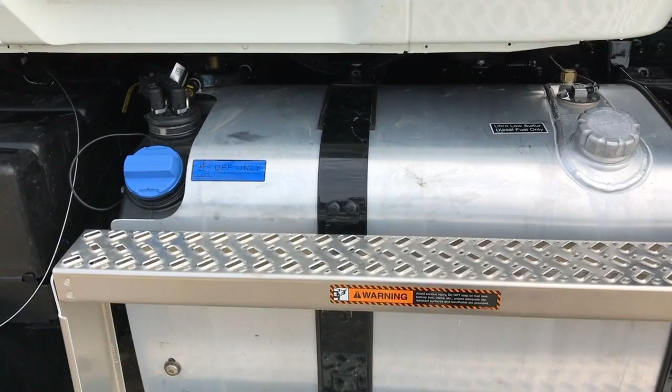This morning I've got a little project to make some parts for these dump trucks. For those of you that don't know, I've got a customer down the road that takes these large Mack chassis and huge dump beds and does the final assembly on it. A lot of times they're missing the parts they need, so I thought I'd walk you through the process I go through to make up some parts from an example they give me. Let's go in the shop and take a look.

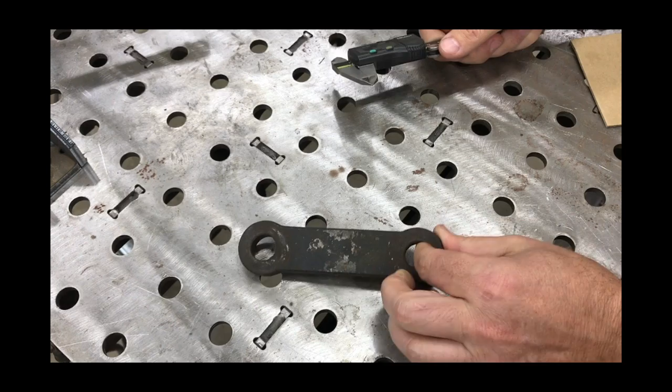All right, so here's a typical kind of job that I get in, and I thought I'd walk you through the details of coming up with this. This is a strap that goes on the gas tanks for those large dump trucks, for the company down the road here that puts those together. They need more of these made, they want 6 of them made, and they don't have any blueprints or drawings. They just gave me one of these, so we're just going to copy it, and I'll walk you through how I do it, and you guys can let me know if you would do something different.

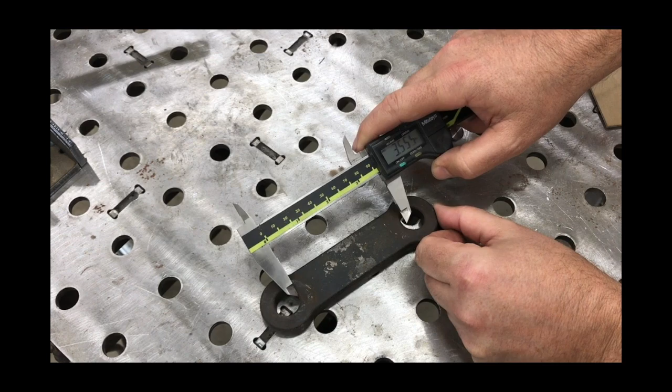First thing I want to do is get the bolt spacing from center to center. But in order to do that, I'm just going to go bottom to bottom, which should be the exact same thing. So I come up with 4 inches, 249 thousandths. We'll go top to top just to verify that. And it does look about the same from top to top, bottom to bottom, so that should put us right on where we need to be, center to center.

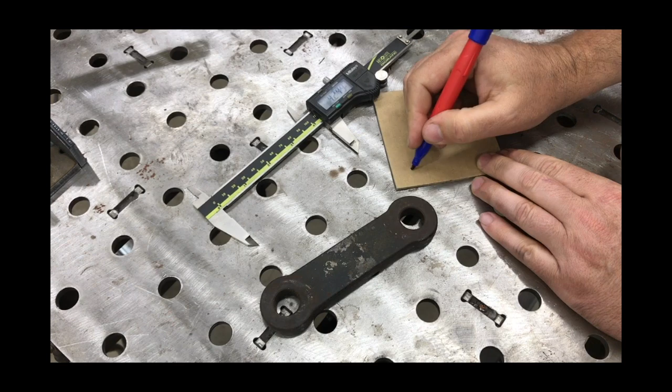So I'm just going to write that down. Let's see... 249, man my writing's terrible. 4.249. Okay, so the next thing we want to get is the hole diameters.

Because when you get ready to do the CAD on this, anytime you're going to try to copy something, you just look for geometric shapes. So what you see here is two round circles basically - an inner circle and an outer circle - and then a rectangle, and that's it. So two sets of circles copied, and then a rectangle.

So let's get the ID of these. I don't know if they kind of look plasma cut - you can see how that hole is blown out. But it also has an embossed set of letters on there, and it appears to have a casting line down the center. So maybe it is cast, and that was something from the casting there. I'm not sure, but anyway, let's get the ID of the holes.

The top side of the holes look more round, you can see the back side's kind of blown out there. So we'll take a look at the ID first, and we'll take a couple of different measurements. I'm coming up with 672 thousandths, and these are just clearance holes, so when I cut these I'm going to probably cut them a little bit bigger than that, just to make sure I get it right.

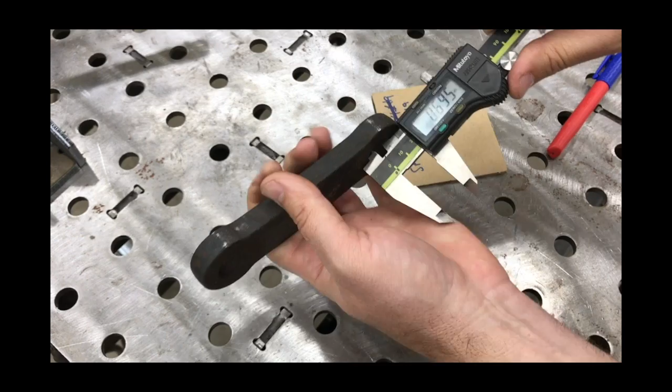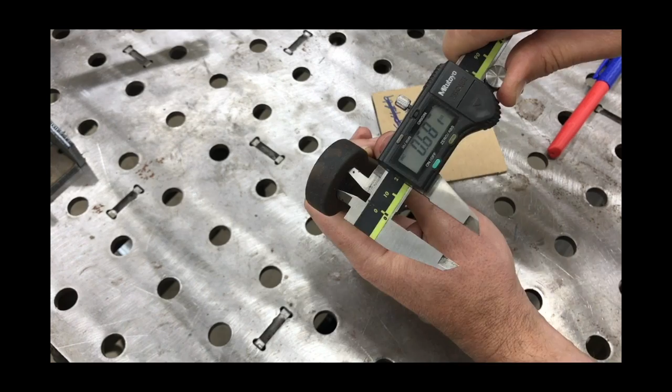Now let's look at the ID. Let me double check this one down here, and we'll write that down. Yeah, see, that one's actually bigger - 706... 687... 711. So I'm going to make it 720 thousandths just to get it a little bit bigger.

So I'm going to go ID... should be 0.720. Man, I can't write today. 0.720. All right, so now we'll look at the OD of these circles.

It's basically 1.5 inches, we'll double check it. Yeah, so OD is 1.49. They told me the outside dimensions of this was not critical - in fact they said I can just make it square with 2 holes, the hole spacing was the critical part. But I'm going to make it just like this, no reason why I shouldn't - it's not that much extra work to do.

So now I need to get the width of this rectangle, and it appears to be 122. I'll just grab it in a couple of spots here. Yeah, if I get it right at the casting line, 1, 2, 3.

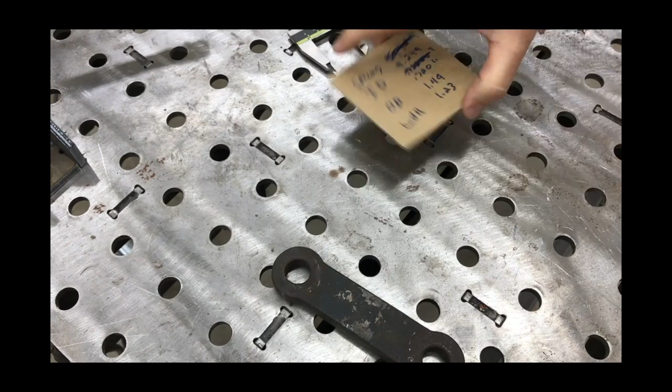So I'm gonna make it 1, 2, 3. So width, 1.23. So now I have everything I need to be able to do the CAD work on that.

For those of you that do not watch my other channel, I actually live here in the shop, and some of you may or may not know that. So we're just going to go into the living room, where you'll notice some of the things that I've made on the channel. And here's where I do my CAD work, Fusion 360, that kind of thing.

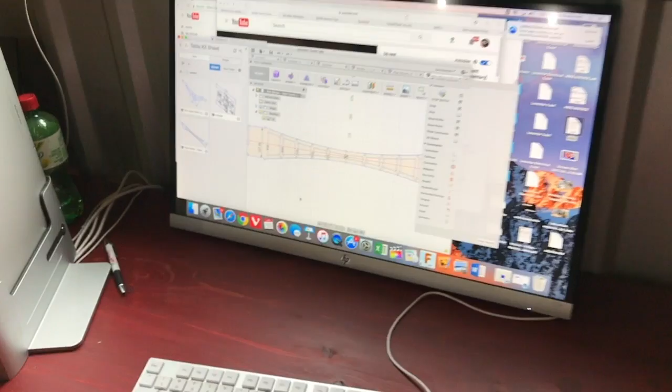So we'll get you set up and take these dimensions and put them over into Fusion 360. Okay, now you see we're in Fusion 360. We'll go ahead and make this full screen. This is for the Lone Star company. You see I've got some other parts I've made for them, but we're gonna just close this window out to maximize our space, and we will go and create a new design.

The first thing we're going to do is the circle. I'm going to hit a circle here, and it's going to be a center point circle. We're going to choose this plane here, and I'm going to draw this circle off of the center axis to lock it down to that. So if you look at our measurements that we took, we're going to do the ID first, and the ID is 0.72.

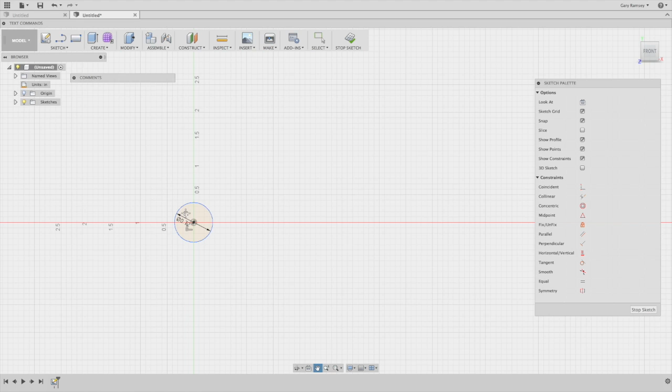Now there's a lot of different ways you could do this. Lots of people do it lots of different ways. I'm just going to show you the way I do it. Some of it may be correct, some of it may be sort of hacked, but this is just how I'm going to do it. One way you could do it is just draw half of it and then mirror it, and that would save you manually drawing lots of stuff. You don't have to draw half of it. But for now, I'm just going to do it the way I would do it.

So we got one circle there, that's the ID. I'm going to draw another one that's also 720, and that'll be the other circle. We know that the distance between centers is 4.249, that's how we measured it. So I am going to do a D for distance and click that and bring this down, and I'm just going to type in 4.249, which is the actual distance. So now we have our distance between the two circles.

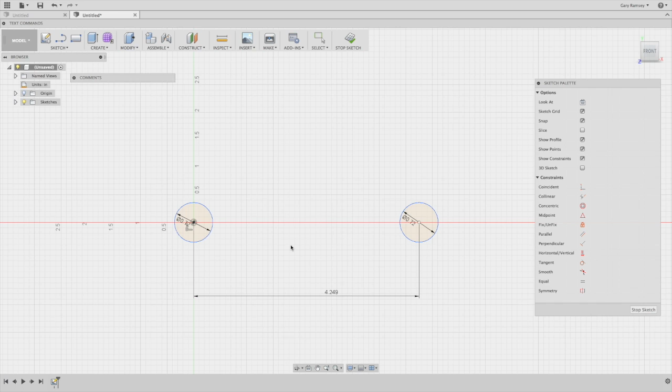The next thing I'm going to do is draw the outer circles, and the ODs are 1.49. So I'm going to just drag that up a little bit and type in 1.49. Same thing over here.

So now we have that, and here's the part that you could probably do a lot of different ways. You just need to draw two lines between those, but that line, they need to be 1 1/4 inches apart. So here's how I'm going to do it.

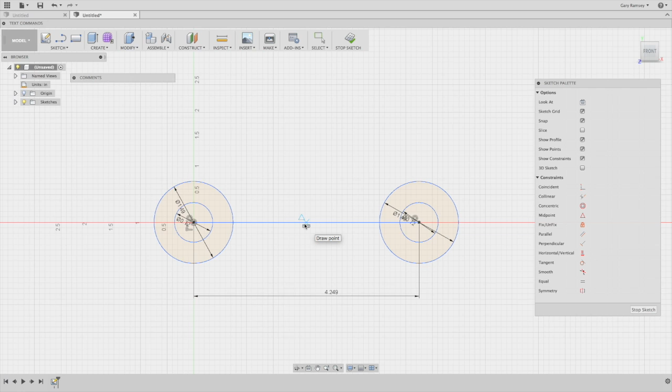First thing I'm going to do is hit L for the line command, and I'm just going to draw a line between these two, connect them together, and I'm going to go up here and put a sketch point. You'll see that as I hover on this line, it's going to give me a little triangle that indicates the midpoint of the line, so that is where I'm going to put that sketch point. You'll see why I did that in a second.

So now I'm going to draw a rectangle. I'm going to go up here and choose rectangle, and I'm going to do a center rectangle. I'm going to make the dimensions of this rectangle - I'm going to make it 6 inches, 5 inches long. And we know by the dimensions that we took that it's 1.23 inches wide.

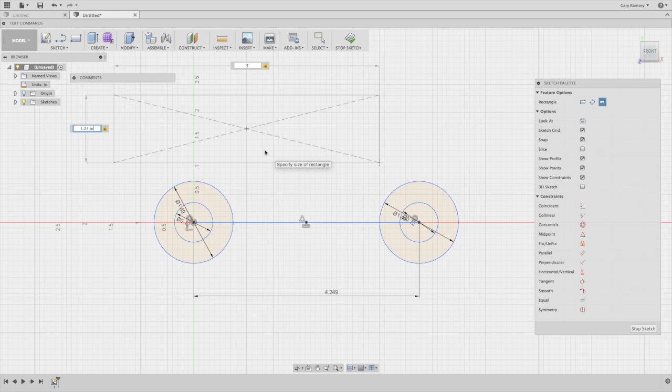Whoops, I messed that up. So let's do it again. 1.23 tall by, I'm gonna just make it 6 inches long, okay? So now we have that, let's change that to 5.

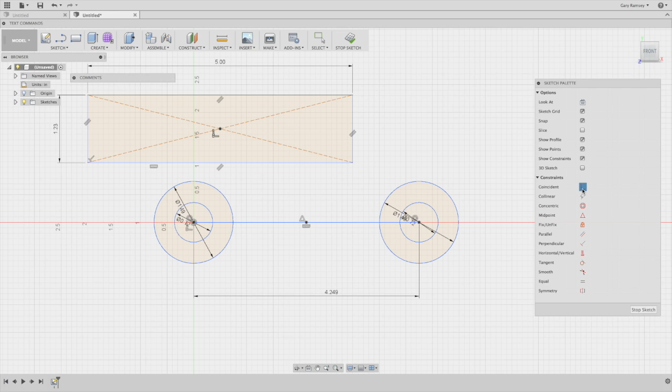Just bear with me here, I'm just kind of working as I go. So now what we want to do is, you see this center point and that center point, we want to get those lined up so that this is directly in the center. So we're going to use the coincident constraint and click on that one and click on that one, and you'll see that it brings it down in there and overlays it.

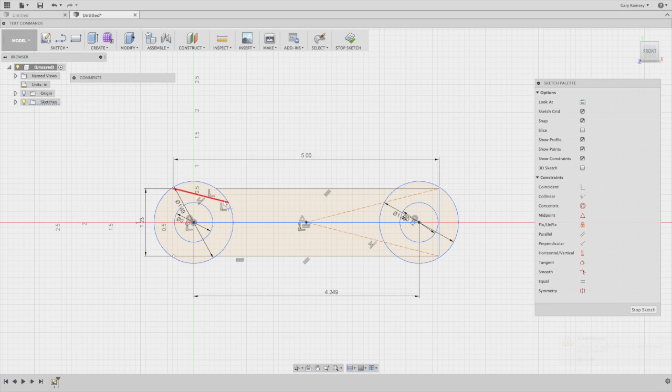But now you see we've got all these extra lines, and if we just tried to cut this like it is, it would try to cut every one of these lines. So we just got to go trim those out. I'm going to hit the T command for trim, and we need to get rid of that, and that, and we need to get rid of that and that.

Okay, so that now is looking more like what we want, so we got to get rid of that one. Got to find all these little extra lines. This center line, we definitely have to get rid of that. It would try to cut that out as well.

Yeah, so we're just deleting stuff. I remember seeing John Saunders do this a long time ago, where he just did his sketching by sketching out the major. I can see I deleted something I didn't need to delete there.

So let me go back. Let me get the T command back and get some of this out. I deleted that inner circle and didn't mean to. All right, so I think I've got all that now.

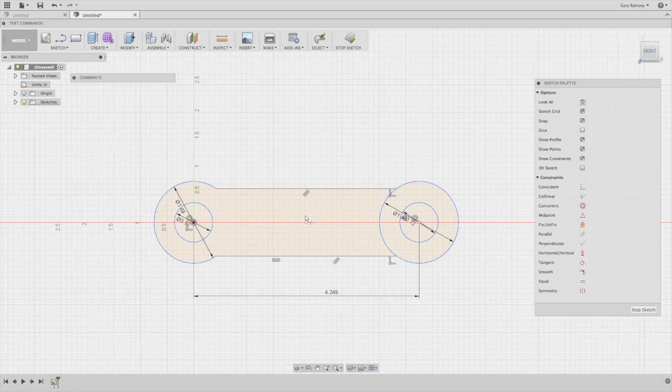So really the last thing that we need to do is extrude this. Oh no, I need to get rid of that. Yeah, so we need to extrude this and convert it from a 2D to 3D, and then we'll come in and add some fillets in here to just soften up these corners a little bit.

So I'm gonna go up here and say stop sketch, and I'm gonna hit E for extrude, and we're gonna extrude this. This is going to be a half inch thick, so we're going to go 0.5 there. And you see we have our part.

So now I'm going to come up here and go modify and add a fillet. I don't know how deep these fillets are. The fillet's going to go... I'm just going to say 0.1, just to add a little fillet in there.

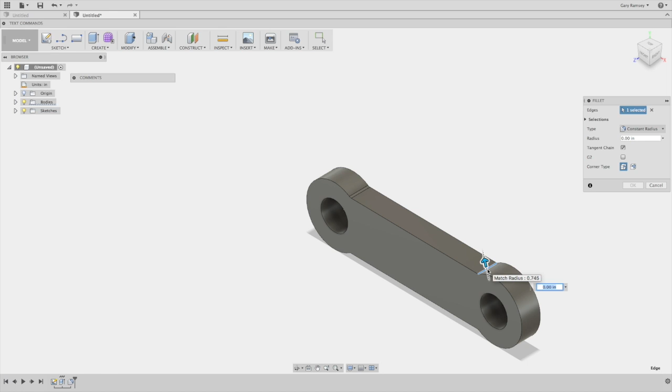All right, and we'll just repeat that. So 0.1. And we'll rotate this around so we can get a look at the other side and grab their fillets.

Okay, so I'll go fillet. Yeah, you can just hit F. I could have done all these at, selected multiple, done them all at the same time. So now we have a little softening right there.

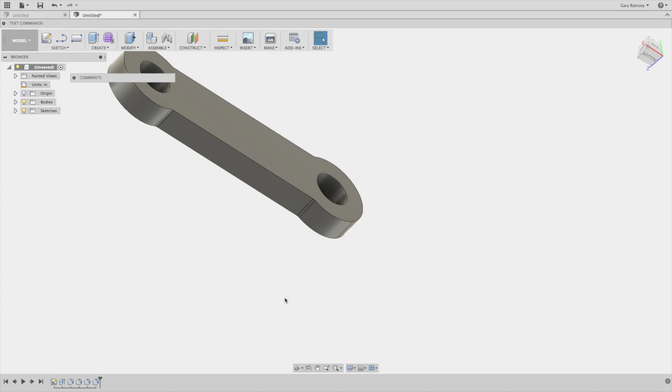Okay, so I think we're done. Now the thing about it is, when you're doing 2D, I don't know that I just, I might have should have added those fillets in the 2D, because what I need to do is now go back down here and edit this sketch. And yeah, see, it didn't carry those into the because it's in the basic sketch.

So what I need to do is add the fillets here. I'm gonna go and do that now. So we'll add that right there, 0.1. And this is just a repeat. Whoops, 0.1. Sorry for the audio there.

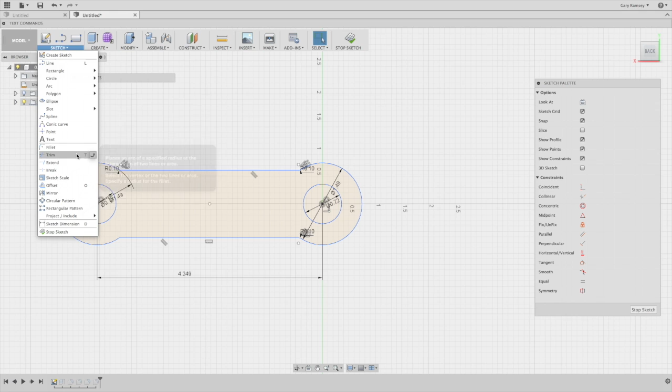Fillet, oh, I'm on the wrong thing. Sketch, fillet. 0.1. And the last one is 0.1. All right, and so I think you can do the cam in Fusion 360, but the post-processor for plasma cutting, I've not found it to work very well.

So I always use Sheetcam that came with my plasma table to do the cam. So I just do the CAD in here. So from here, I'm just gonna go right click on this and save as DXF.

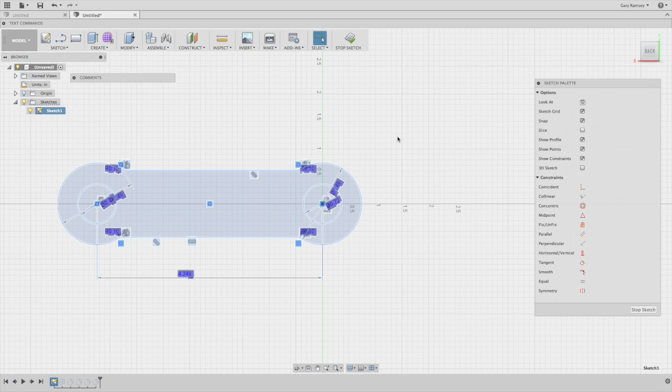And I'm gonna call this gas tank bracket. I'm just going to stick this on the desktop of this machine because we're gonna sneaker net it over to the... let's see, let me get you out of this. Yeah.

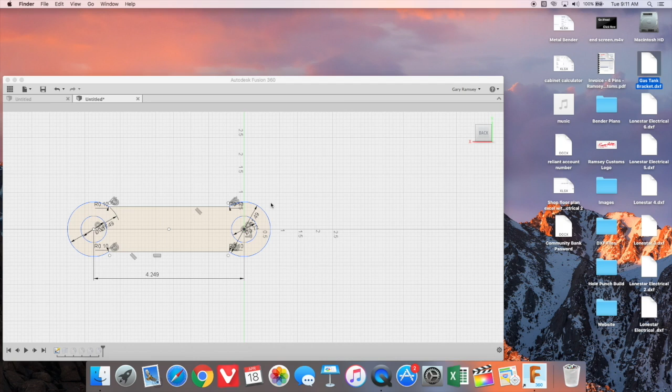So you can see, let me move that over. You can see my gas tank file there, and where I've done multiples. I'll just copy this over to my other computer and get it cut out. I may show you the CAM work as well, just to bring you along. But this is it for the CAD part - we're all drawn up and ready to go.

All right, so we're going to take our file that we just came up with, the gas tank bracket DXF, and we're going to drop this onto this thumb drive here, and sneaker net it on out into the shop.

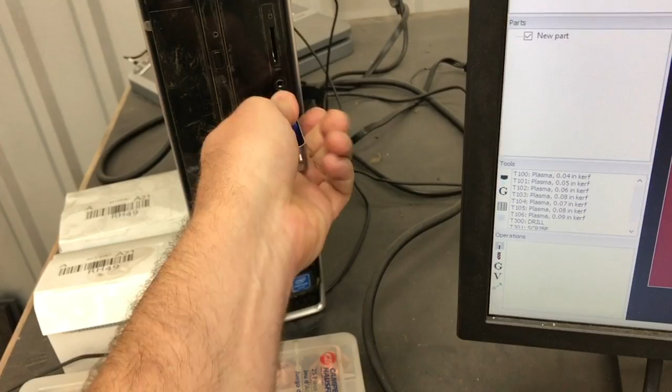And you see our plasma computer here. I mean, I could use my Google Drive, I could use any number of different things, but I'm going to skip taking you through my IT setup here and my lack of sophistication on that. But anyway, we're inserted here, and I'll get you set up and we'll walk through Sheetcam.

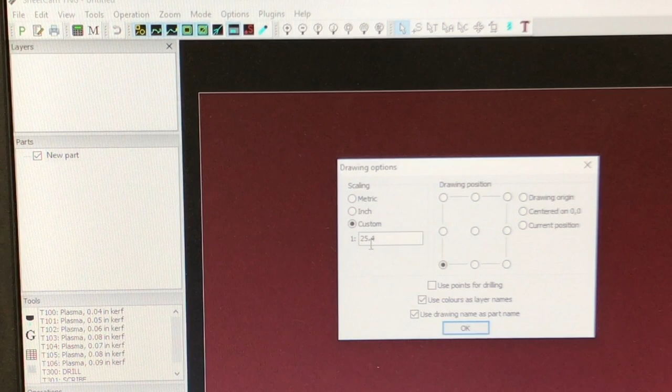All right, so what we want to do is go up here and click on import drawing. This will import our DXF file, and you see the gas tank bracket there from our thumb drive. Then this will ask you what's the scaling of it - is it metric? You can adjust the scaling if you want to go custom, and this defaults to metric, so 25 millimeters equals 1 inch, but we're going to just do it in inch.

But if you wanted to make this bigger, you would just say, if you said 1 to 50, that would mean a 1 to 2 ratio - it would make it twice as big. But we're just going to go with that, and now you see our part in there. You'll notice that very small chamfer that it added, or fillet. If you looked at the original part, it didn't have a very large fillet there, so I think we're good, and we could have left that off - it wouldn't have been a big deal.

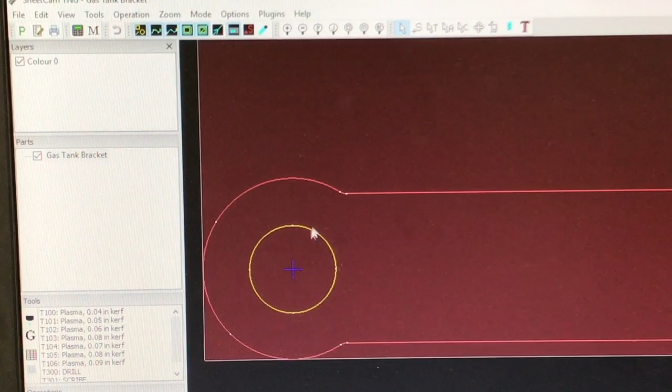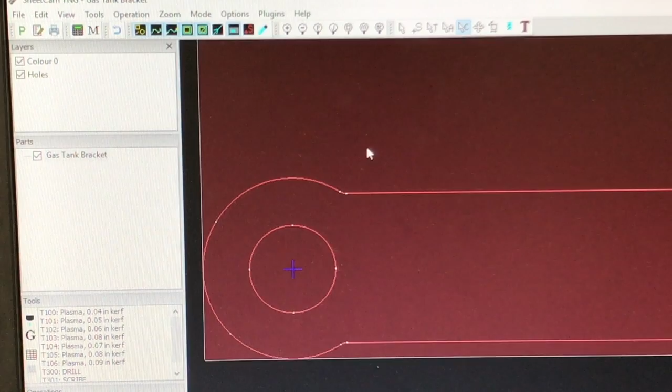But the one thing we have to do here is go to Edit Contours. We're going to right click on these inner holes, and we're going to move them to a new layer, because right now it's all on the same layer, and we have to have two different cut paths, or types of cut paths. So we're just going to call these holes, and then move this one over to holes as well. So now I have those on two different layers. And we're just going to add the tool path - I'm going to select the type of offset, so this is going to be outside.

All right, I've shown this before, but I'm going to walk you through my process to get sheets on and off the table. I've got a half inch sheet partially cut that's up on the top of my trailer there, and I just need to get it hooked up to the gantry crane and moved over. I'll probably fast forward you through some of this, because honestly it's painful for me to do, and it'll be painful for you to watch. But I've got some stuff on the table - I'm going to move that out of the way, and then we'll go through the process of getting the thing moved over and go from there. So I'll fast forward you through that.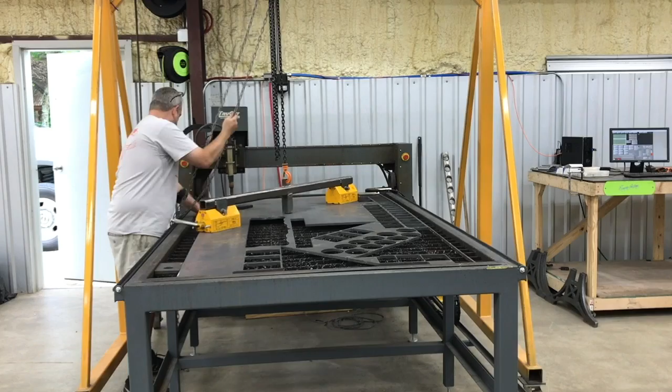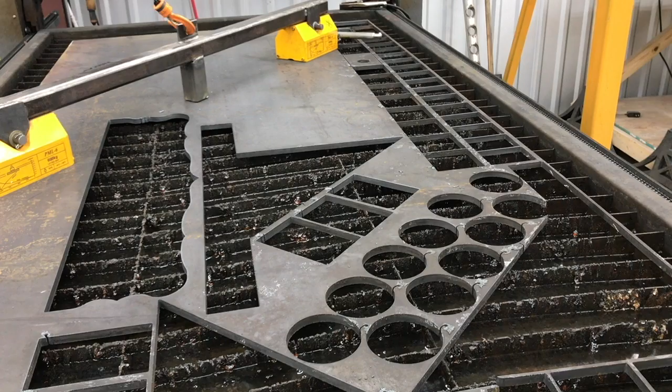All right, well, you saw me hassling around with that - hopefully I got you through that pretty quickly. So what I'll do is come up here and place this in a few spots and see where I can get some out of it. I probably can get 2 there, but it's kind of finicky to position it and get the angle there. This one probably is going to be easier to do.

Yeah, so I need 6 of them. Or I can get one out right there, straight up and down, and one out right there, straight up and down.

Doesn't leave much room for error there. Remember, you have to leave that lead in and lead out, and you can't have them too close together, otherwise they'll want to cut into each other.

All right, let me get this figured out, and we'll get our magnets off, and then we will get those cut.

All right, this is our Mach3 controller screen where we set all the details about how the machine and controller is going to run. We have loaded our G-code from Sheetcam in. This is the G-code window over here, the commands it's going to process, the XY coordinates and all that on where to cut and where to go.

So this is 1/2 inch. We're running with an 85 amp tip. The book says 48, I'm going to go 43, just knowing the machine, so we're going to put 43 there. We're going to cut this at 0.07.

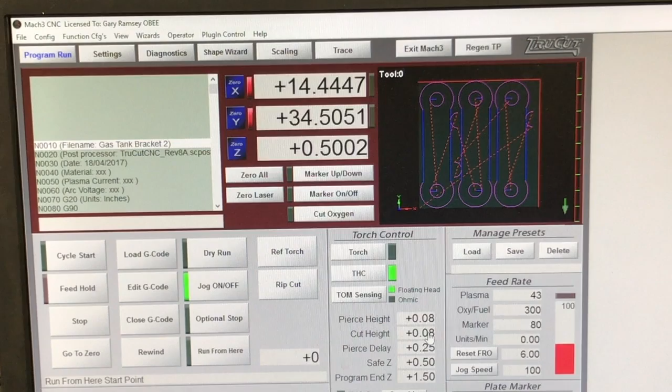And let's see, we're going to zero out because I have the gantry already slid over into place off camera. You didn't see that.

So we're zeroed out. We've got 3 that are going to go vertical, 3 that are going to go horizontal. Let me change this, it somehow didn't take. So the book calls, oh, and we need to go 0.5 on this. So yeah, we should be good to go there.

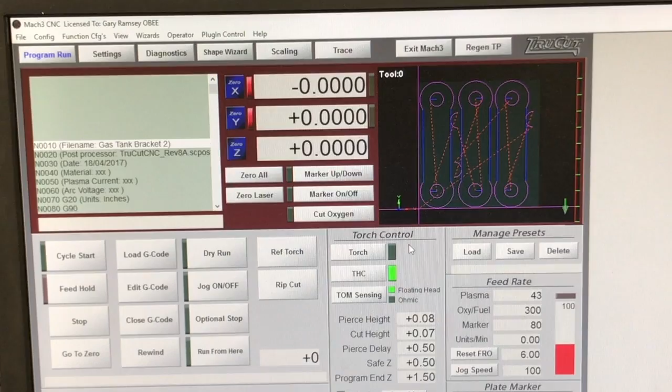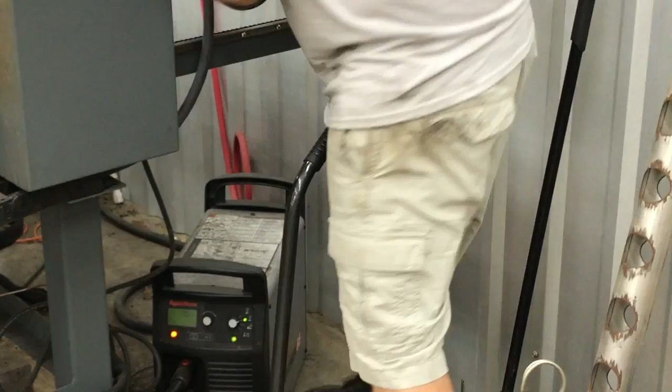The plasma machine, let me show you that. See that orange light? That's got an error message on it. I think it's error 50 because I took the tip out of it and cleaned it, and anytime you take the tip out and put it back in, you get that error. So we're going to turn it off and back on to clear the error.

So we're all set now. We're set to 85, we got air pressure up, and we're just going to come over here and hit our cycle start button. And then I'll move you around so you can see it cut.

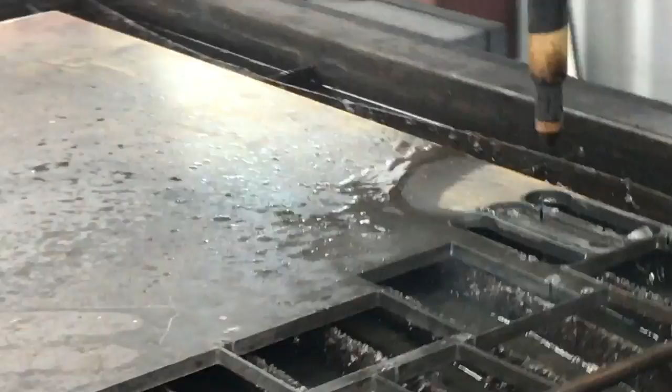All right, so I cut 3 out there. We'll wait for that to shut off. I was just going to point out something here.

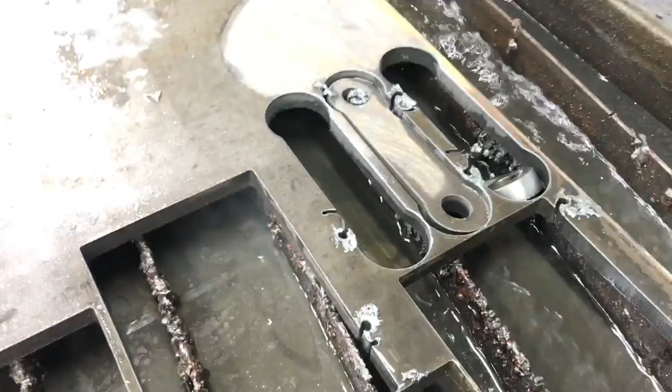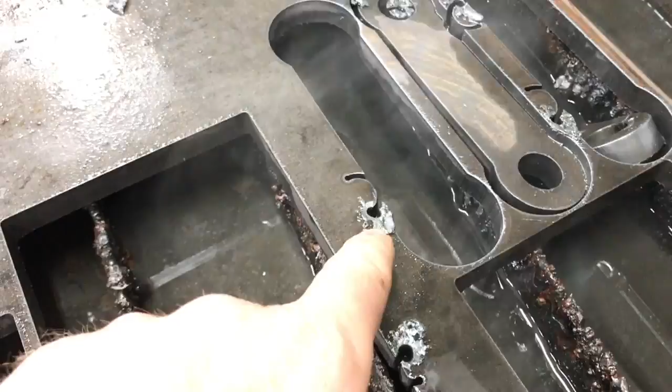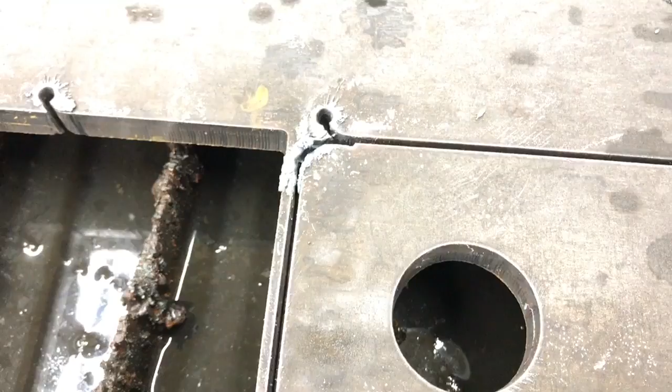The reason it's important to put that long lead in is the pierce point. It puts all this dross up on top of the surface, and the reason I ran it at 70 thousandths cut height is because if you have this too close to where it pierces, the torch will move across this dross, and it'll grab on the torch and move it and cause, well, you see that where it came back across there, dragged it, and then it just sort of half cut and nipped the corner off, and now I can't get that out of there. I mean, I will be able to eventually, but...

So it just makes messes like that, and it looks like it might have, maybe not, I can't tell, but we'll have to see about getting that center out. So there's little things like that that are kind of annoying that you have to pay attention to, and sometimes you want to get really aggressive, especially on expensive material, and be able to put parts really close together and all that, but sometimes you just can't.

That's about as close together as we could have got that, and you see our neighboring pierce point did not interfere with our part here, so we had maybe a 1/16 clearance. So I was just about right there for that.

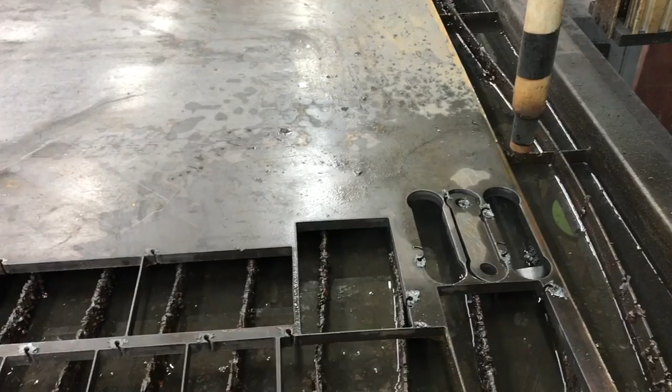So I'll get our other 3 cut going this way, and then we'll go from there and go get these delivered. All right, here's our stack of completed parts.

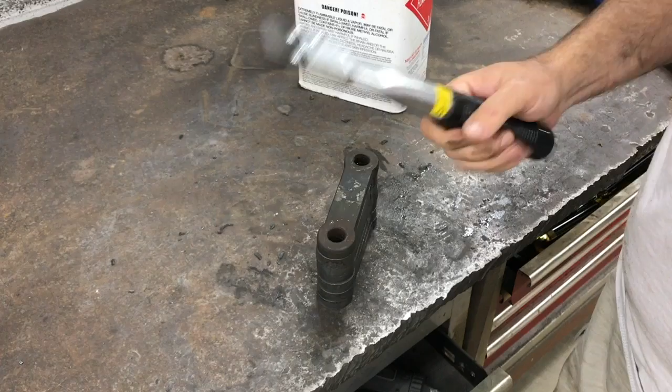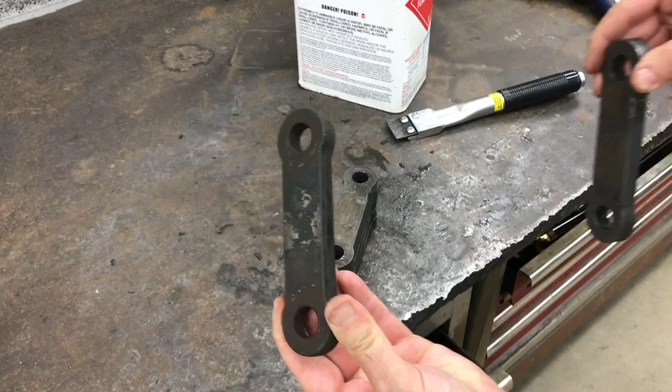I just took the scraping burr here that Reed Eichner sent and just cleaned them up a little bit, knocked the dross off the back of them. But here's the original one that they sent, and here's the one that I made. Just kind of, you see those holes line up pretty good there.

So they have a U-bolt, and it must be 5/8, but it's a U-bolt that goes underneath that, and it's a strap for the gas tank.